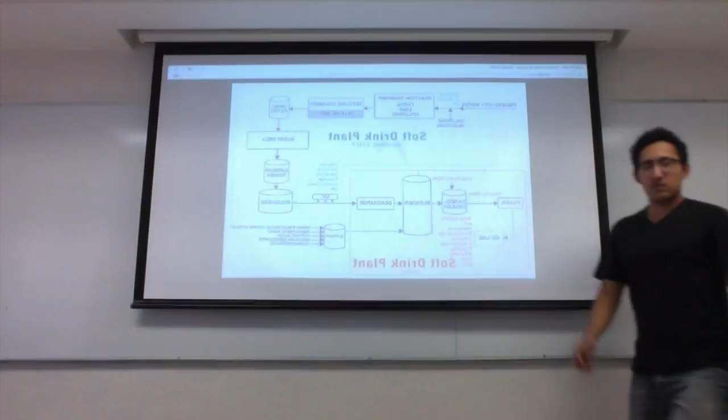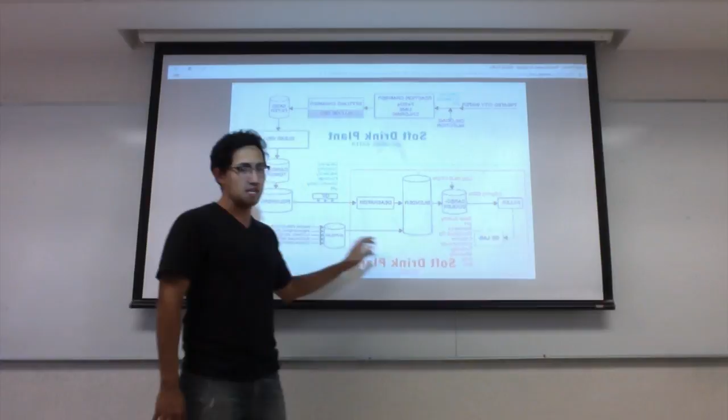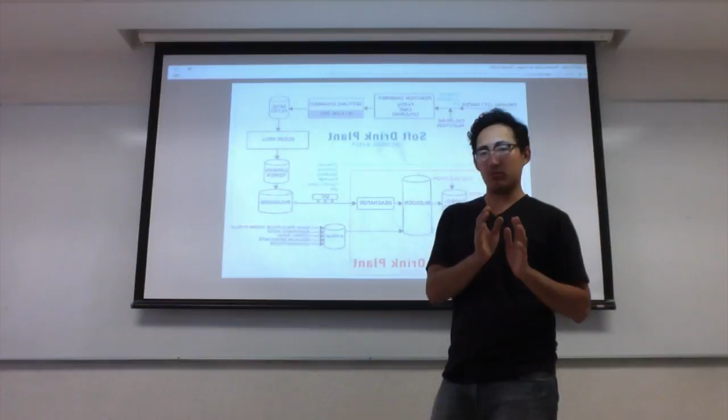Here we have a general overview of the process of making soft drinks. All of this part is only the treatment that is given to the water before entering the mixing with the syrup. So we can see that in the making of soda, one of the key and most important parts is the treatment of the water. Then comes the mixing, and then the carbonation, and then the packing.

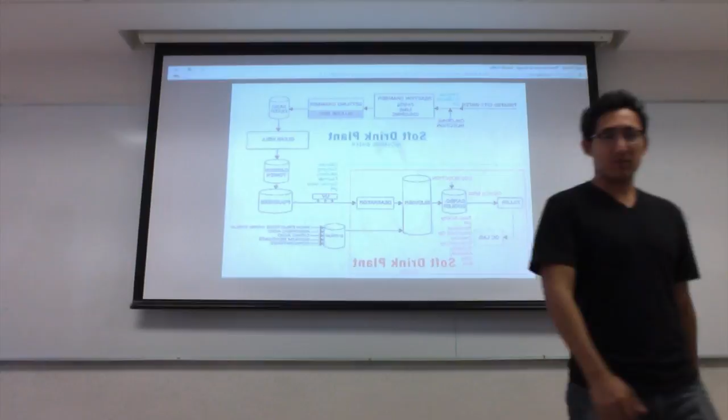In this type of process, we need a type of plant that requires product distribution. This means that one unit operation is realized each time. The unit operation never changes and the steps are the same.

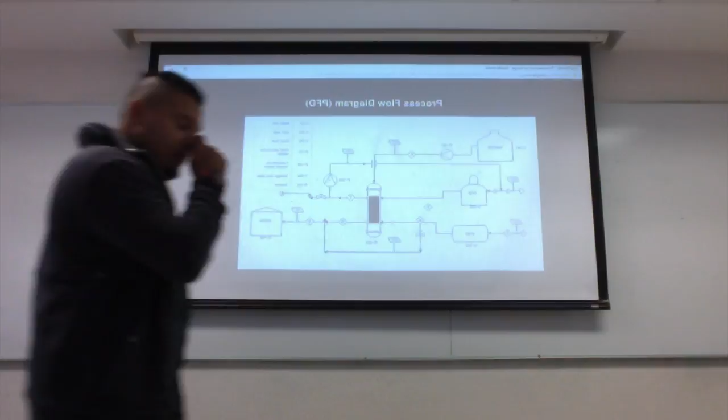Well, we did a process flow diagram that includes a reactor. We introduce the water and the CO2 and the syrup, and then mix it in the reactor to obtain soda. We put a bypass stream because we want the soda to have a good flavor, and at this point you can lose the flavor of the soda.

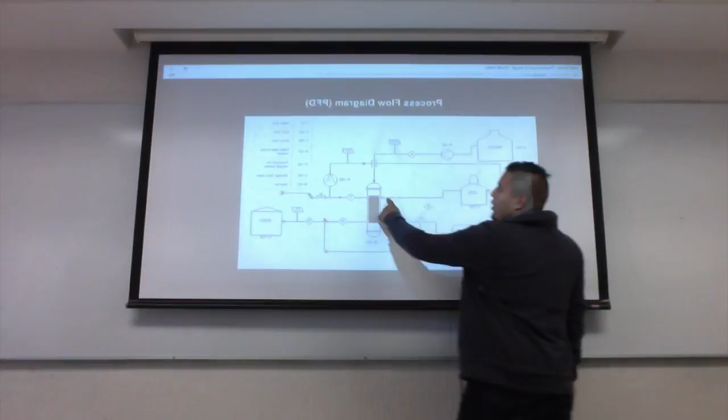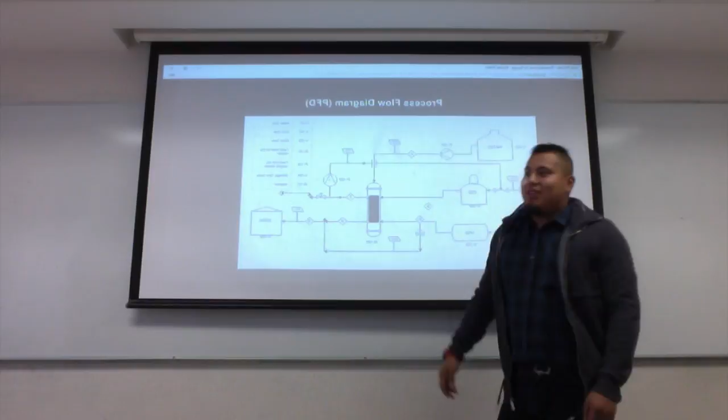We do a recycle stream for all the CO2 that doesn't react, and we do a purge because we want to be more efficient. We did a huge research so we could make a summary table. We looked for a process so we could establish the number of moles we're going to use for a specific batch.

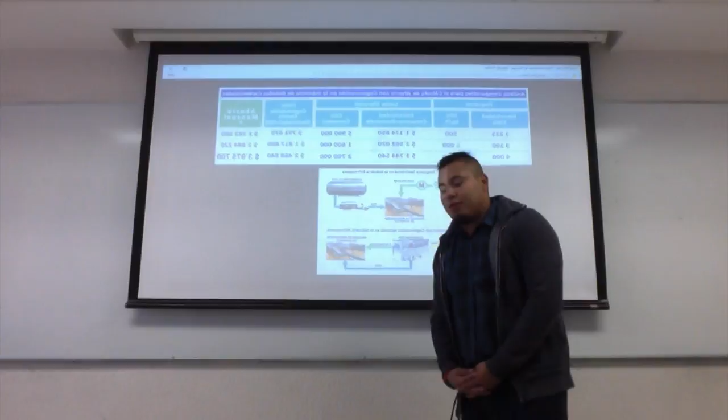Well, then we did research to know how the energy is consumed in this industry, and we found that about 116 watts per liter of soda are used, and we see a person consumes like 160 liters per year, and this is a lot if we compare with the person that lives in Mexico.

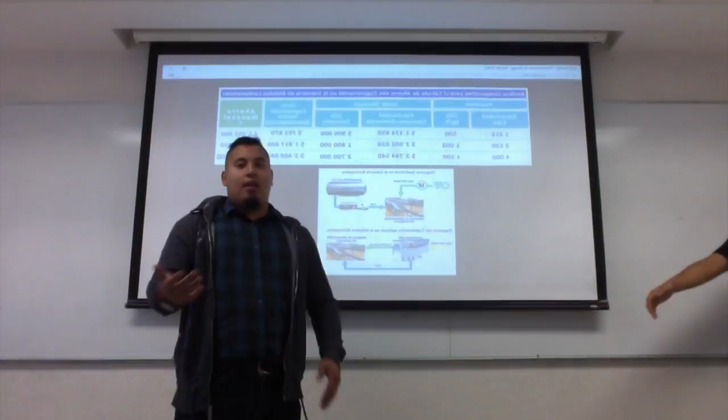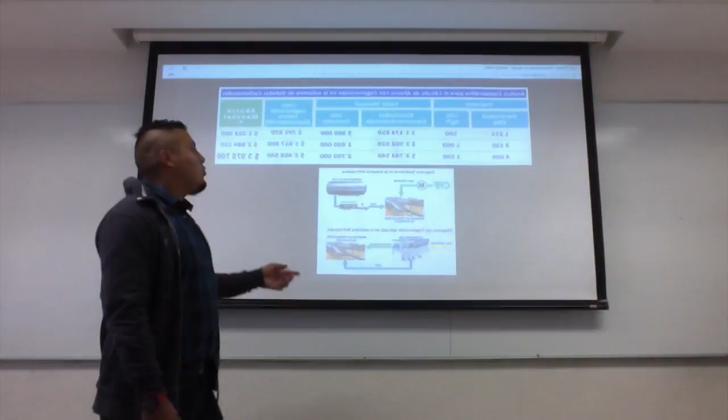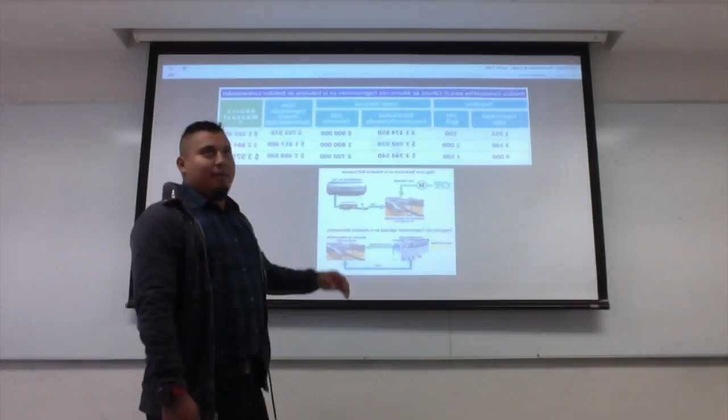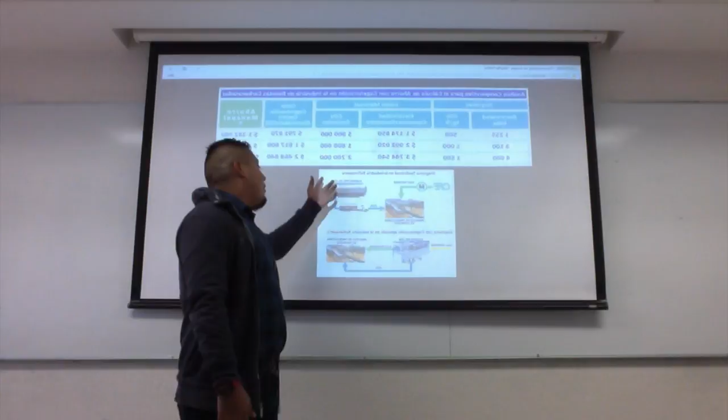We found this. I think that the industry can use it; it's based on the cogeneration of electricity and CO2. The typical way is that one enterprise gives electricity to the plant, and another enterprise gives the CO2. And with this, we can produce the electricity at the same time as the CO2,

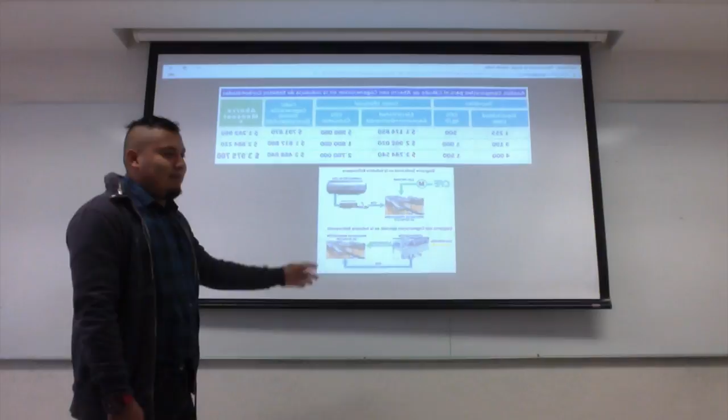and you can make a lot of savings, and you can take care of the environment.